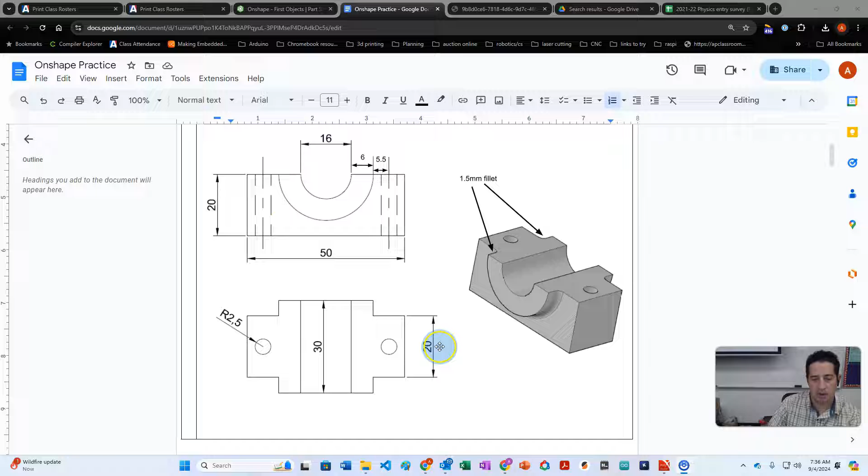So we're going to start by sketching this shape. We're going to ignore the construction lines. So we're going to do the rectangle with these two arcs in it, and then from there we're going to extrude it twice to build the shape. Then we're going to remove those holes and we'll add those fillets.

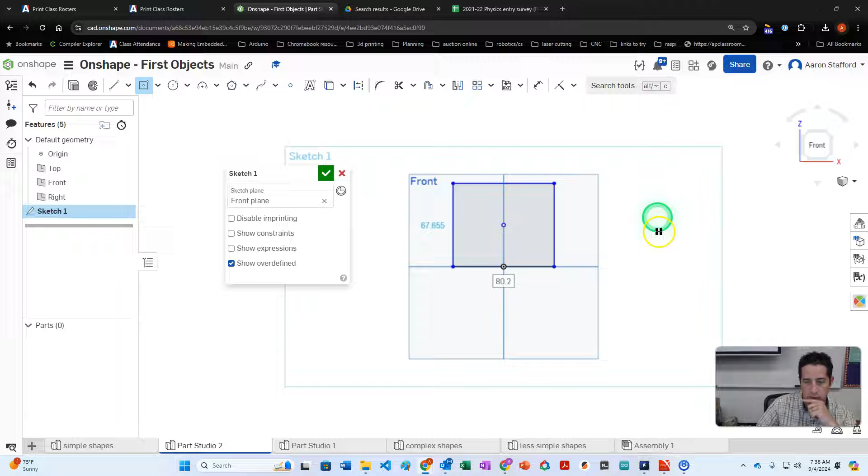Okay, so since this is kind of like a front view sketch, I'm going to start by sketching on the front plane. Press the letter N to go perpendicular to our sketch. Okay, so I'm going to do a center point rectangle. I'm going to start it above the origin, like that. Let's set the length of this to be 50, and the height of it to be 20. Okay, perfect. And now we're going to put that little arc in it.

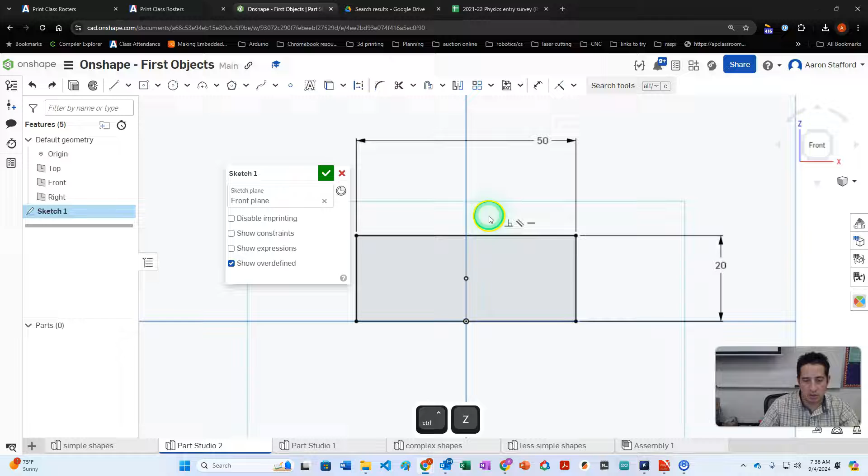So let's get our arc tool, and I'm just going to draw a 3-point arc. Like this. If I pull it down, I can snap it to have that midpoint constraint. That makes it easier, but if you don't, I'll show you how we can add it differently. The other thing I want to do is make this vertically constrained to the origin. Let's go coincident. We're going to click on that center line, and now this guy's centered for me. I also want to snap it to there.

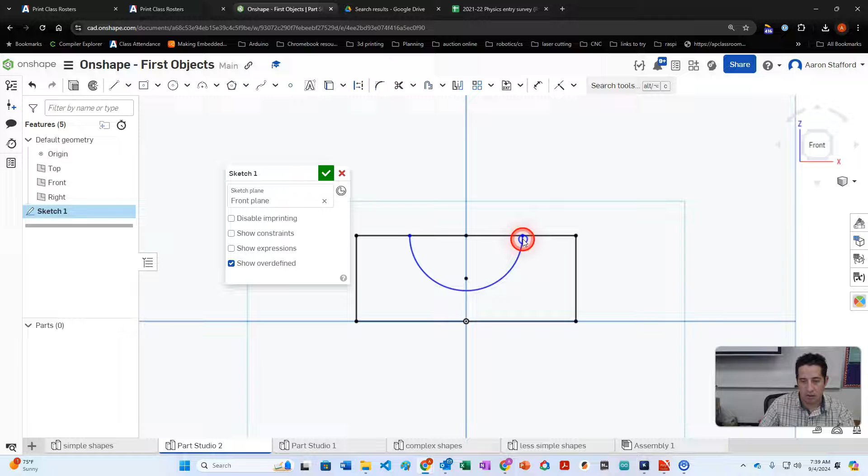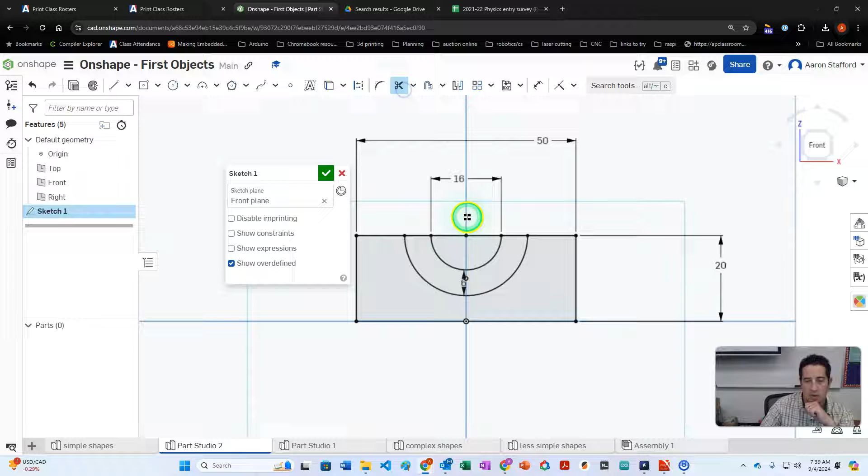And now let's set a diameter of 16 for this. And now let's do an offset of 6. Then press the letter I to get coincident. We're going to make sure these are coincident to the edge. Okay, now our sketch is fully constrained. I think we're going to trim this part right here. Nope, we'll leave it alone.

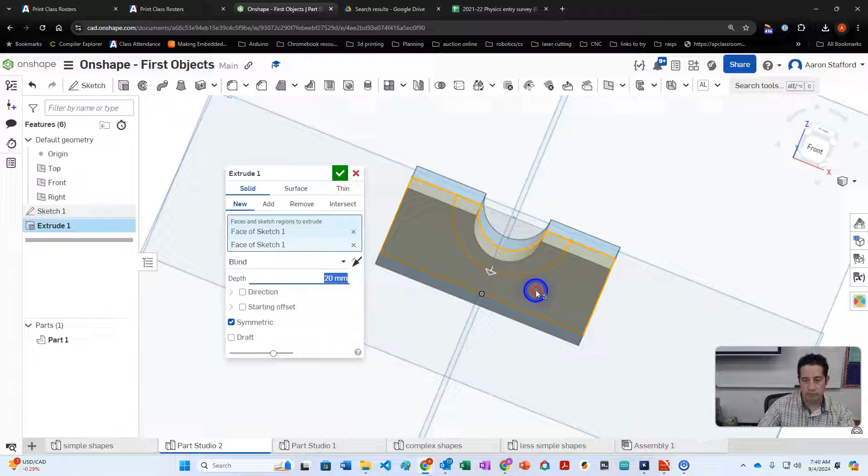So now we're going to extrude. Let's extrude this region and that region. Let's do it symmetric, and our depth here is going to be 20. And so now we've got that little shape. We're going to make our sketch visible again.

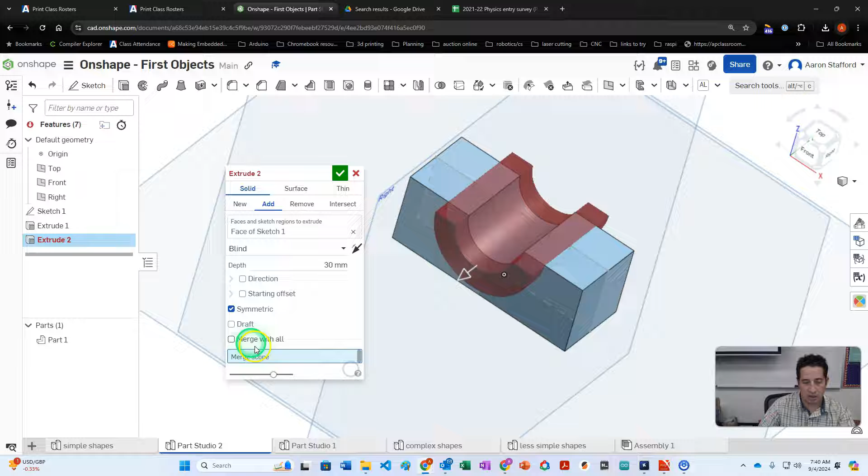And we're going to extrude again. I'm going to hide this so we can select the region. We're going to extrude that region to be 30, and we're going to go symmetric again. Here it automatically selected add for me, but if it didn't, you can select add, select your merge scope, or choose merge with all. And there we go.

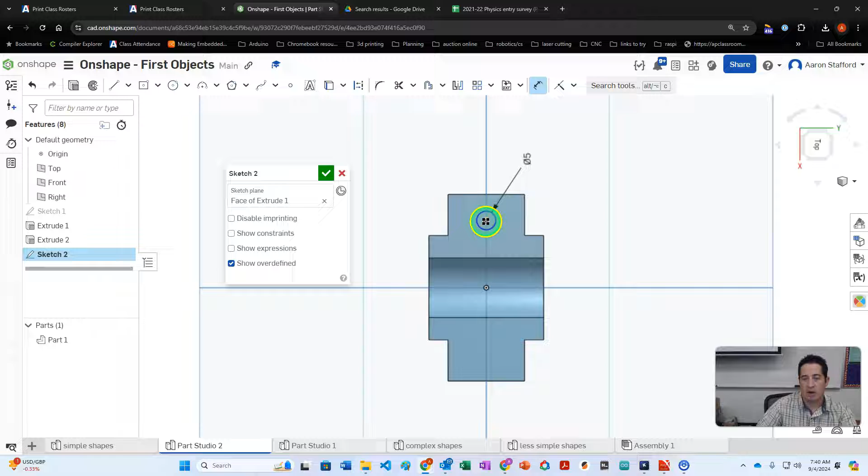The next thing we're going to do is add the holes to the top face. I'm going to hide that sketch since we don't need it anymore, and make a sketch on this top face. We're just going to do a hole right here. We got a radius of 2.5, so that means the diameter is 5. And we're going to set a distance from this edge to be 5.5 millimeters. Nope, it's not to the edge of it, it's to the center of it, like right here. There we go, that should be 5.5.

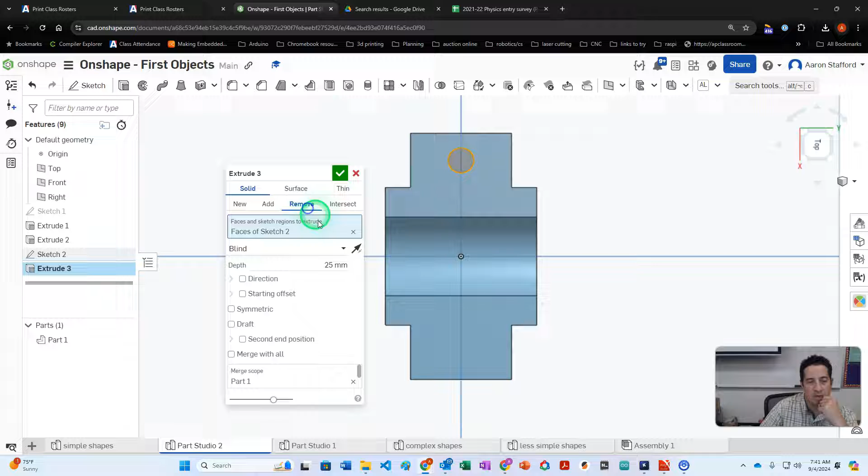Now we can make another circle down there if you want, or we could extrude this one, remove it, through all like that, and then we can mirror it. This is maybe a little more complex. It's probably easier to just sketch it twice, but we're going to go to feature mirror, select that extrude, and select the right plane as our mirror plane. And there we go, we've mirrored it across.

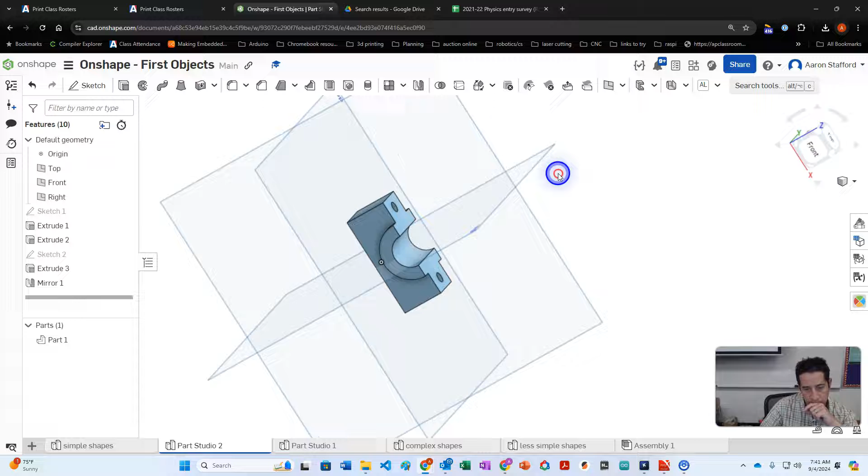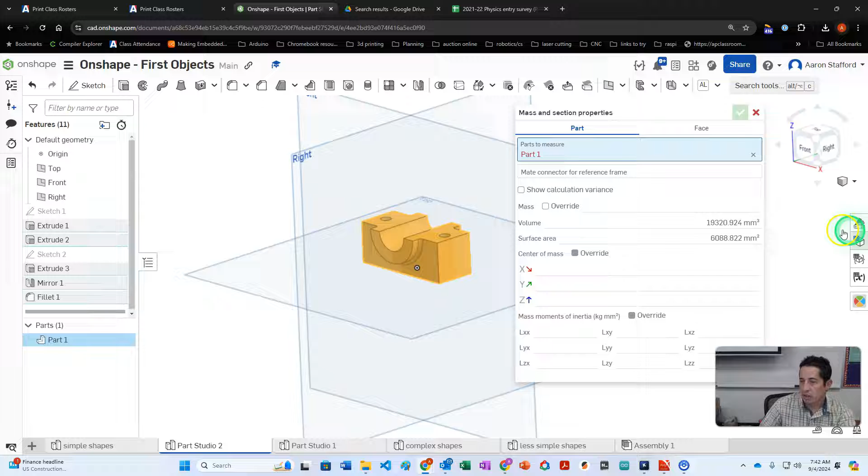From here, the last step is to add a fillet, so we want a small fillet right there and a small fillet right there, and we want the fillet radius to be 1.5. Okay, and there you go. Let's check our volume, and our volume is 19,320 cubic millimeters, which is what we have in the instructions. It looks like we got it.

All right, so we made this shape right there. Let's scroll over. Here we go. So that's the shape we made right there. Okay.